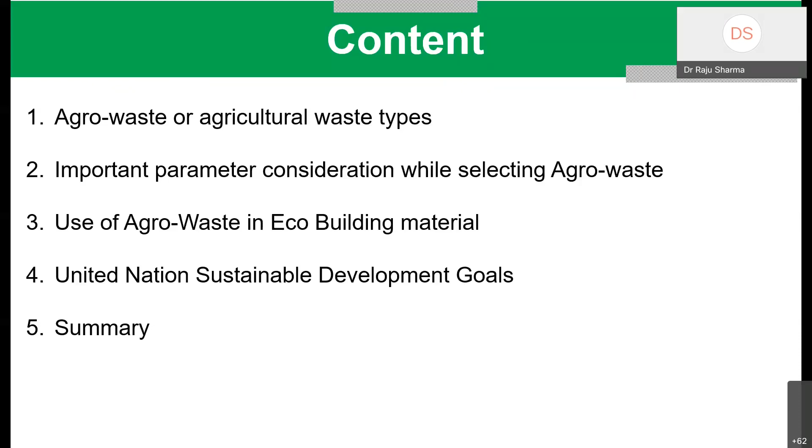So in this presentation, we will see the agro waste or agricultural waste types. Then we will see the important parameters to consider while selecting agro waste, and then use of agro waste in eco building materials, and finally I will give you a glimpse of the UN Sustainable Development Goals, because of these goals only, this sustainability came into existence in the last one or two decades in the field of civil engineering. So it is the right time to make ourselves aware of these SDGs, basically those related to infrastructures. Then we will conclude with a summary.

So if you look at agro waste or agricultural waste, we have various types of waste. We have rice husk, as India and China produce most of the quantity of rice in the world, and that gets exported all over the world. And with that, we have the consequences of producing this waste, and that waste comes in various varieties, and we have to handle those varieties of waste associated with rice husk.

Next is sugarcane bagasse ash. Sugarcane is also produced in very high quantity in India, so the waste associated with that is also a challenging issue to handle. Then there is oil palm shell. It is not something more produced in India; it is basically in Malaysia and nearby regions, where those countries are very much interested in utilizing this particular waste, and they have been successful in using it.

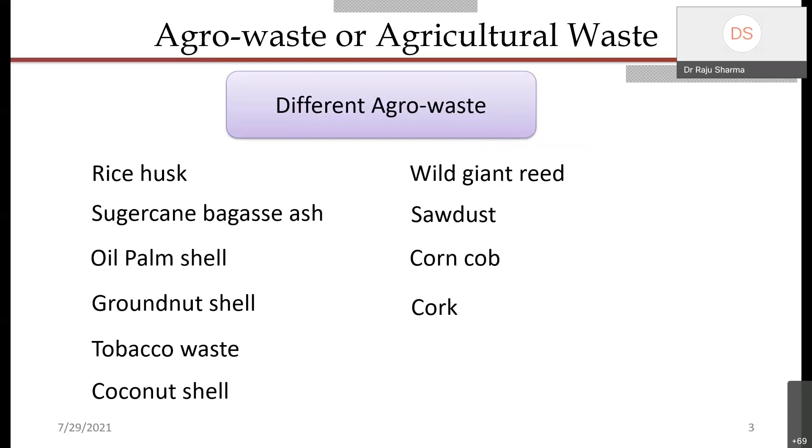Then we have groundnut shell, tobacco waste, coconut shell, wild giant reeds, sawdust, corn cobs, and cork. So we have various varieties of agro waste, and it is not that all the waste have equal proportions of importance or weightage to use in concrete. It is just that various researchers try to utilize this waste based on their own local problems, because some countries have a major problem with rice husk ash, some will have oil palm shell. So based on that, it is a global approach, a global view which I am giving to you, that different types of waste are there.

So if you see this sugarcane bagasse, we never thought that industries would be facing this kind of waste produced from sugarcane bagasse.

As we talked about with the organic state, that will not lead to any success if you use that particular product in a concrete or cementitious material, because that organic material with the period of time degrades with environmental factors, and you're left with voids inside the concrete. So there is no use of using this material in its direct, organic state in concrete.

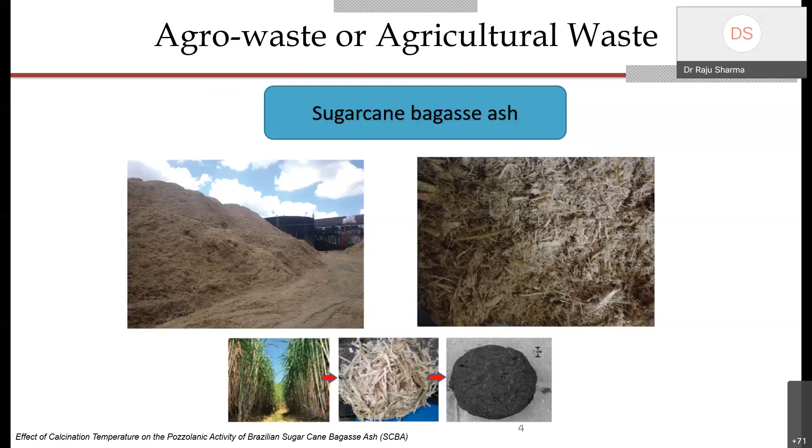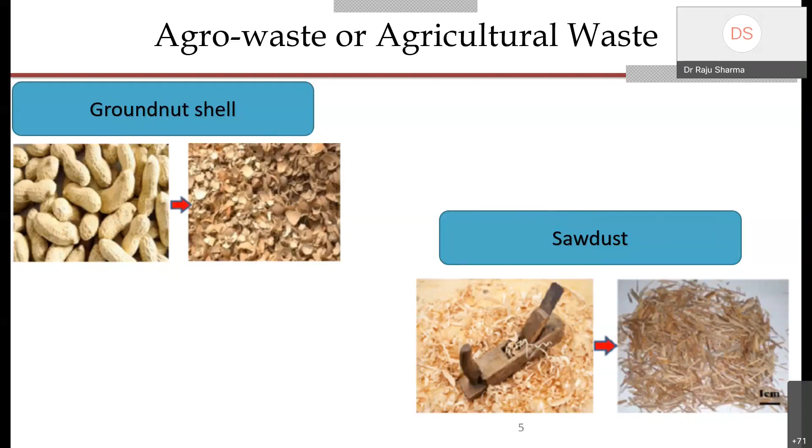I'm showing you images so you'll be more familiar with this. Groundnut shell - some countries face this issue because they produce a lot of groundnut shell. Sawdust is another example, used in concrete. Wild giant reeds are also used as ash in concrete, as is tobacco waste, and rice husk ash - you can see the transformation stages associated with different types of waste.

As I told you, the first waste we produce is the rice husk itself. That husk has no advantage in being used in concrete as a cementing material directly. There's no use in using raw rice husk, because as I mentioned, it will degrade over time in the presence of the aqueous solution in concrete. So you have to convert it into ash, and then use that product in concrete.

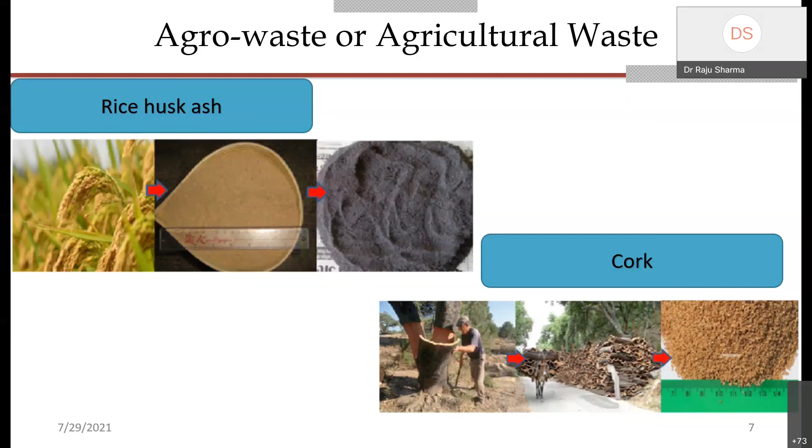Next is cork - some countries have used lots of this product and are trying to utilize it in concrete. Now, next we'll briefly discuss sugarcane bagasse.

The fibrous residue from sugarcane, after the juice is extracted, is about 40 to 45% and is known as bagasse. Bagasse is reused as fuel for heat generation in various industries. Once consumed, it gives ashes with an approximate volume of 8 to 10%, which we call sugarcane bagasse ash.

The production of sugarcane is more than 1,500 million tons in the world, and in India about 10 million tons of sugarcane bagasse ash is treated as waste material. As I told you, if the amount of waste increases, it becomes a problem for any country. If the amount is very small for different countries, they won't focus on using that waste unless it gives very high or good benefits.

So the point is it can be used as a fine aggregate replacement, meaning it acts as a filler in concrete, to mitigate the disposal problem as well as minimize the use of natural aggregates. You can replace it with fine aggregate, or you can replace it with cement. If we replace fine aggregate, we're thinking of it as a filler material, or if the particle size distribution differs from sand, it may improve particle packing in the concrete.

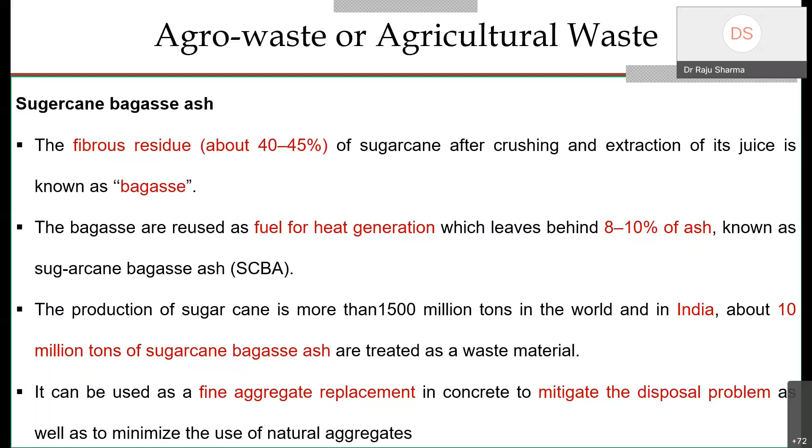But if you think of it as a reactive material, then it will react with the hydration products and may help increase the strength of the material. So it depends on how you're treating this particular waste in your research. If you're replacing cement with this material, you might not achieve a higher percentage replacement - you have to sacrifice performance. But if you replace fine aggregate, you can achieve a higher extent of replacement and still get good results.

Regarding groundnut shell, it can be found in large quantities as agricultural waste in Nigeria, producing up to 2.699, meaning 2.7 million metric tons per year.

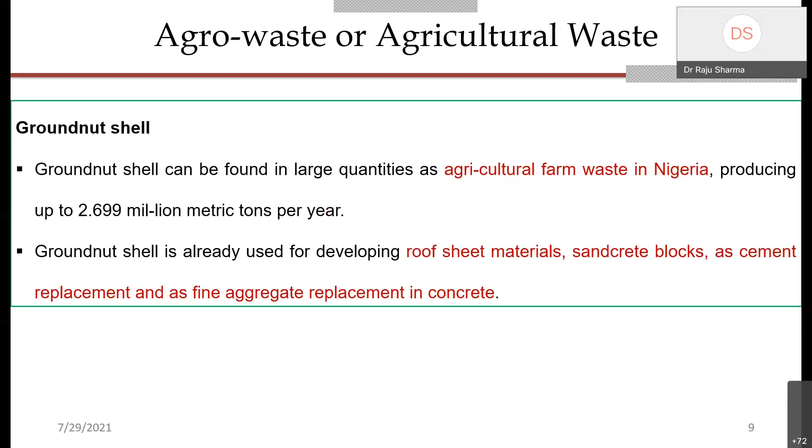Groundnut shell is already used for developing roof sheet materials, sandcrete blocks as cement replacement, and as a fine aggregate replacement in concrete. Now next is sawdust.

We saw that as a waste, sawdust is the main component of particle board. It has a variety of other uses, including serving as mulch, an alternative to clay cat litter, or as a fuel. The use of sawdust for making lightweight concrete has received some attention over the past years. Mageswari and Vidivelli reported that as a substitution material for natural sand, sawdust might be the right choice as fine aggregate in concrete.

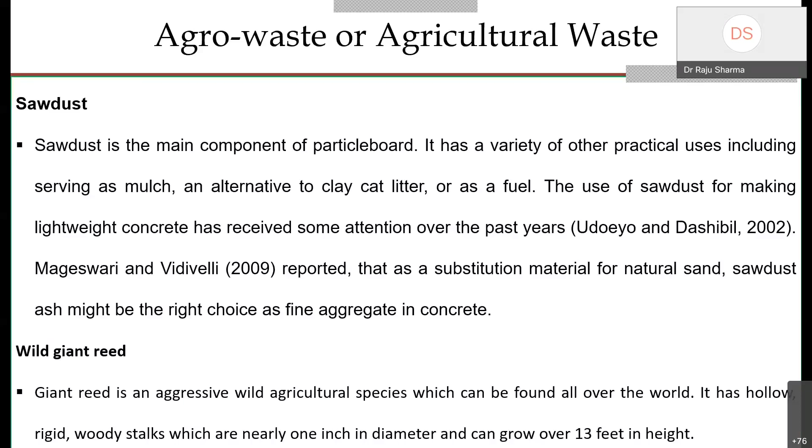Wild giant reed is an aggressive wild agricultural species which can be found all over the world. It has hollow, rigid, woody stalks which are nearly 1 inch in diameter and can grow over 13 feet in height. So some people are using that particular waste also in concrete.

Rice husk is one of the fundamental agrarian wastes, obtained from the external covering of rice. When you uncover and remove the cover from the rice grain, you get this particular rice husk. Not exactly rice husk, but you can use rice husk ash with concrete up to 10% replacement.

But the point is the physical and chemical properties of rice husk matter a lot. So in my presentation I will emphasize how the physical and chemical properties affect the properties of the final product, and what different parameters you have to look into while considering these types of waste for producing concrete.

Next is cork. Cork is a renewable resource, a natural lightweight cellular material separated from the bark of cork oak trees. A variety of studies have analyzed utilizing cork as part of the construction industry, mainly in cement mortar, because of its unique composition and cell structure, which gives low density, low thermal conductivity, good sound absorption, and water resistance.

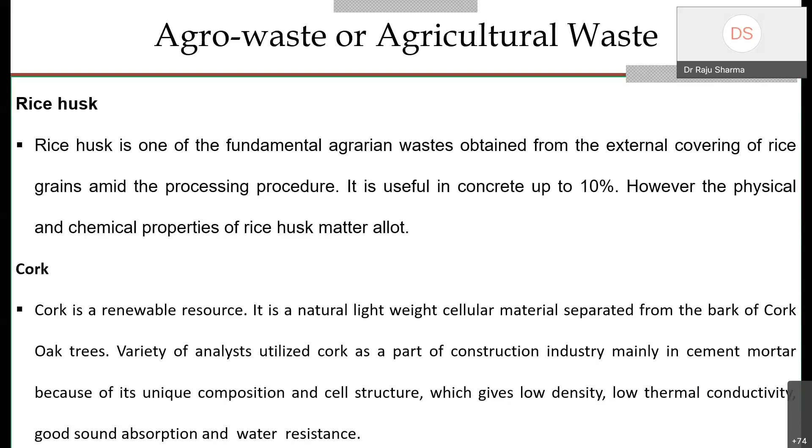Now, next is tobacco waste. Tobacco may not be of much concentration for some countries, but in some countries where it is highly used, they are looking for a solution for that. So when you go for tobacco waste, that can be used for lightweight concrete rather than normal concrete.

So to produce lightweight concrete, tobacco waste can be considered a good ingredient. But if you want to produce normal weight concrete with it, you cannot, because the specific gravity is low and you cannot produce the same amount of weight using that particular tobacco waste.

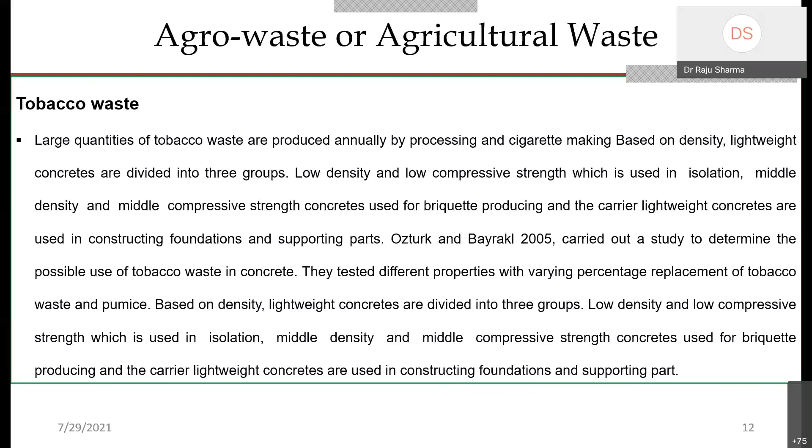So you get low density and low compressive strength concrete from tobacco waste, which is used in isolation. Middle density and middle compressive strength concrete is used for producing briquettes, and the lightweight concrete is used in construction foundation and supporting parts, right?

Then next is corn cob. Corn cob has silica oxide of more than 65% and a combination of alumina and silica of more than 70%. This means corn cob ash can be used as a cementitious material in blended cement concrete. Although the use of the ash of this waste in concrete technology started more than a decade ago, the use of corn cob grains as aggregate is only recently developing.

So let me brief this discussion to conclude these 5-6 slides. You have seen that various types of waste are available with us, in different forms. It may be a kind of direct waste after using the product, which we then use again for fuel, and the waste produced from that decreases in amount and we use that waste again. So you can see it approaches the problem in different ways. It is a kind of engineered problem where you get the material and make it suitable for different applications.

If you want to produce lightweight concrete, it's okay to use tobacco waste. If you want to get high strength concrete, you cannot produce that with tobacco waste. So what is the best solution to get high strength concrete? You have to go with rice husk ash. People are using that particular waste in ultra high performance concrete development, so you can produce that with it. So it's a kind of material where nothing is unusable as an ingredient in concrete.

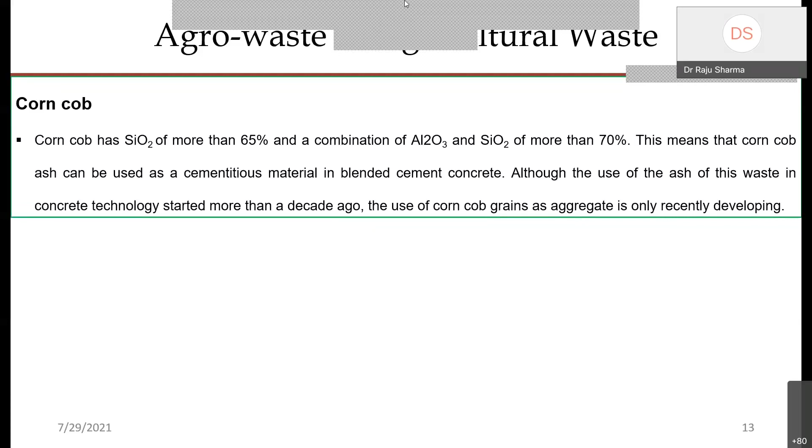Everything can be used, but you have to look at the application of that particular product, what you want from that particular thing. If you want lightweight, you have to use that particular kind of waste material. If you want ultra high strength concrete, you have to see the waste in a different way, from some in-depth technical parameters.

So what are those parameters? I'm making this presentation in different segments to connect the previous general discussion to the technical aspects of this particular waste. So we will move towards the important parameters associated with the use of agricultural waste or agro waste in concrete.

Now, if you see here, there is a comparison of sand, crushed granite, sugarcane bagasse ash, groundnut shell, oyster shell (OS), and sawdust. We have rice husk ash, wild giant reeds, and we have cork also.

If you see the mechanical, physical properties of these particular materials, the specific gravity is 2.38 to 2.64, and crushed granite is also having the same, but a bit higher than that because it has a dense microstructure than the sand. And then you have SCBA, sugarcane bagasse.

You can see the variety, the range, of this specific gravity. That is the point where researchers feel difficulty to standardize their results, because some parts of the world have lower specific gravity, and some parts have a bit middle range, and some have high specific gravity.

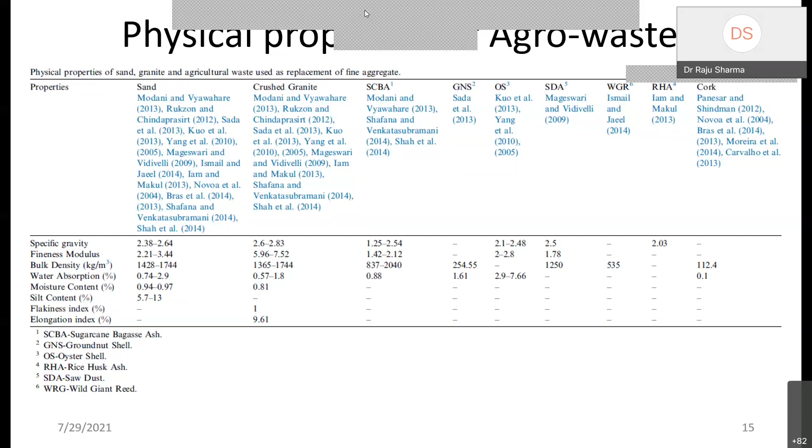You can see the oyster shell is also having 2.1 to 2.48, so it is a good kind of replacement as a filler with the sand. You can see the specific gravity here, so it can be used, but it cannot be used solely for producing lightweight aggregate unless you are choosing lightweight coarse aggregates. By only replacing sand with OS, you cannot produce lightweight concrete, but maybe only by replacing sand with SCBA, you can produce lightweight concrete. RHA is having 2.03.

Cork is... then you can say fineness modulus. So another physical property which is most important in changing the microstructure of concrete is the fineness modulus. It can change the packing behavior, it can alter the need of binder in a particular volume. This is very important, because fineness is very much related with the surface area of the product.

The surface area matters because nucleation always starts from the surface when it comes in contact with the aqueous solution, and that surface creates the hydration product. As much as you have higher surface fineness, you can create high strength, but it is not a straight line - it is related with the amount of binder as well. You have to change the binder up to a certain percentage; after that fixed percentage, your results may decrease. So this is not a straight statement.

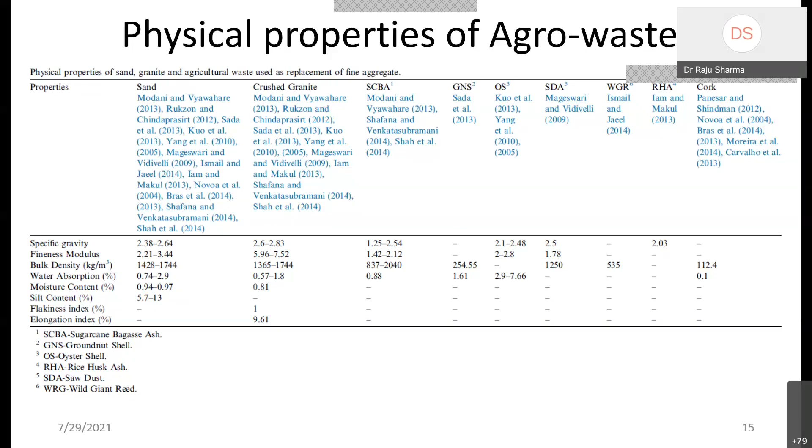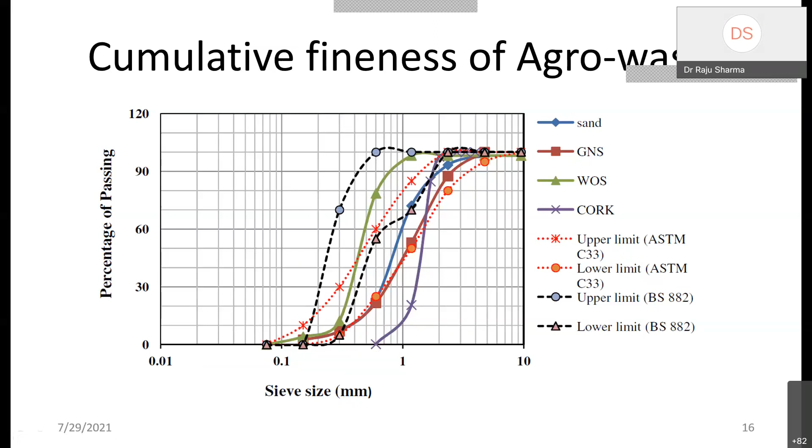So they use it accordingly. Let me show you the fineness of different agro waste. Here I am showing the sugarcane bagasse ash, which is calcined at 500, 600, and 700 degrees Celsius. They prepared the fineness modulus, the cumulative percentage fineness, and found that the product is basically very fine as compared to the cement.

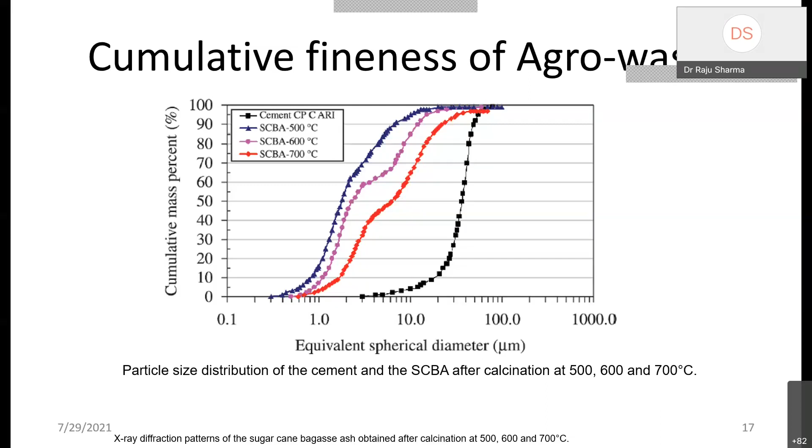So one thing is very clear from that: it will give you the packing, it will improve the packing behavior of the concrete. It is very much clear from here. The packing behavior of the concrete definitely changes when you use it as a percentage replacement in concrete. But I'm not talking about how it behaves chemically, because I do not know the chemical composition of this particular sugarcane bagasse ash, so I cannot comment at this slide how chemically it will affect. But how it will affect physically, you can see from here. If you replace with the cement, more finer particles you are putting into the system, and you will get a denser structure.

Now, I'm just connecting these things with some already established statements about supplementary cementitious material, so that you can use this kind of logical reasoning in your research as well. If you see, silica fume is an extremely fine particle. It is spherical, glassy, with an average diameter of 0.1 to 0.2 micrometer. The specific surface area is in the range of 15,000 to 25,000 meters square per kg, compared with the value of 300 to 600 meters square per kg for other cementing materials. So these are the physical properties of silica fume.

Now, how can you use this information to make the reasoning in your research? If you have some results, how can you explain them? The presence of silica fume in fresh concrete generally results in reduced bleeding and greater cohesiveness. This higher fineness of the silica fume, leading to higher surface area, results in higher reactivity. Consequently, superior strength and durability is obtained.

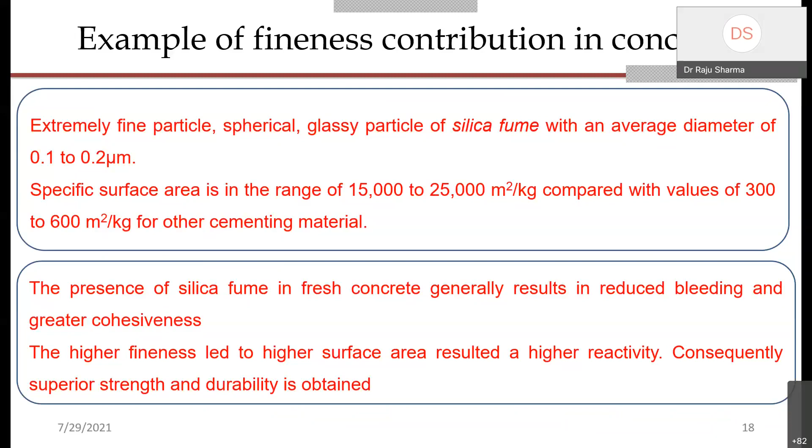This higher reactivity, still, being a researcher, you cannot conclude without looking into the chemical composition of this particular product. So if you say higher surface area increases the strength, yes, this can be a good inference after looking at the cumulative distribution fineness of the product. But without chemical composition, you cannot say it has high reactivity, although it's already a firm statement in research. So I'm using that word here without showing you the chemical composition, but just to show you how you can use this particular reasoning.

This calcium content is very high because if the calcium is 1%, the results will be different than calcium which is 10 or 11%. So therefore, some researchers are getting different results than others because of this kind of difference in chemical composition. Now, if you look into the oyster shell, you can see that.

You can see there is a higher amount of calcium. So if there is a higher amount of calcium, that can be representative of a reactive kind of filler or reactive supplementary cementitious material. So the behavior of this particular product is more dominant towards the hydration product formed by calcium rather than silica.

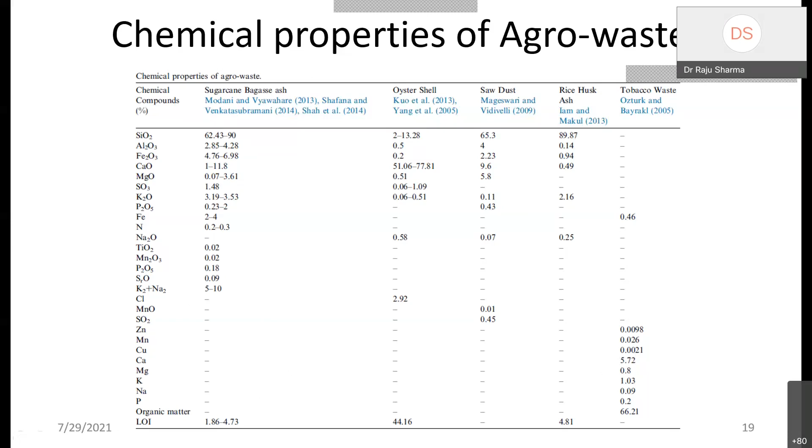Then we have tobacco waste. You can see this tobacco waste does not have the kind of elements which we want for producing good quality concrete. By this statement, you can say here calcium is more, so it may react with that a little bit but not much. It will act as a filler kind of product.

Now if you look into oil palm shell waste and coconut shell and compare these properties among them, you will find that the specific gravity of oil palm shell and coconut shell is lower than crushed granite. So it means there is use in replacing crushed granite with oil palm shell and coconut shell - if you replace that, you are taking the heavier material out of the system and putting lightweight material into the system. So by seeing this, you can say the final product will be a lightweight material, having a lighter density than normal concrete.

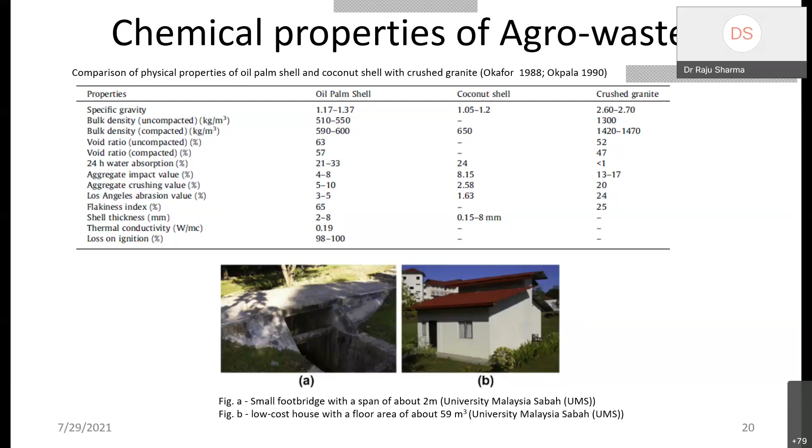So there are other combinations as well. Next is an example of a small footbridge or low cost house with a floor area of about 59-60 meter cube, produced at University Malaysia Sabah. This is the final product of cumulative research from different countries, we can say.

Now in more depth, if you go into the chemical properties of agro waste - here's an example of bagasse, where you can see XRD of the same product but at different temperatures. This means calcination of this particular product has been done at different temperatures to find out the effect of calcination on the final product.

So if you see here, around 27 two-theta degrees, you can see a peak with a plus sign which shows SiO2. So here you can see amorphous SiO2 is increased as the temperature is increased. And you can also see at 500 degrees Celsius there is almost no amount of CaSiO3, but as you increase the temperature, you get peaks of CaSiO3. So by this way, you can analyze how calcination, how your treatment of the waste, improves the final property of the concrete.

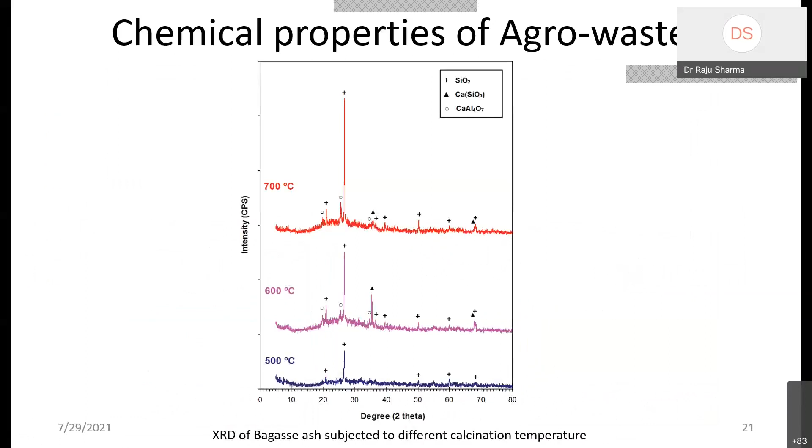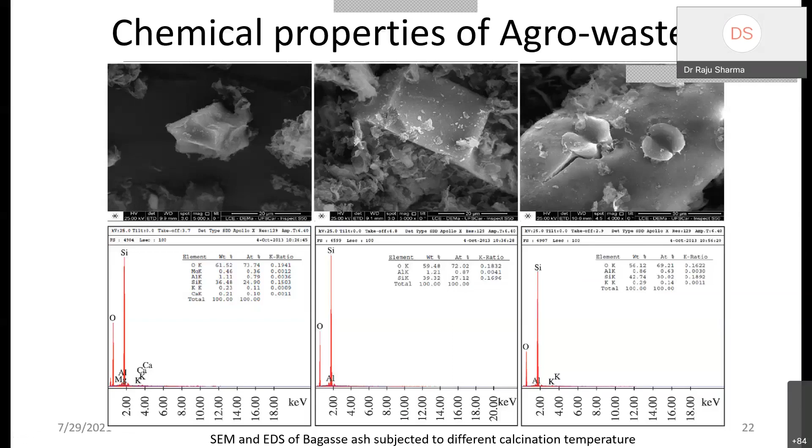When you move to the next temperature, 600 degrees, you can see in the central bottom EDS image that SiK weight percentage is 39 and atomic weight percentage is 27. Compared to the previous one, the silica is getting higher. At the higher temperature, silica is 42% and atomic weight is 30%. So it's increasing the amount of silica in the paste, not as an individual material, but increasing the chemical composition, which may give an advantage when using it in concrete.

It is advantageous when they replace this sugarcane bagasse ash with a fixed 10 weight percent replacement of cement. So SCBA is replaced with cement at 10%, with the variable being the different calcination temperature of the final product.

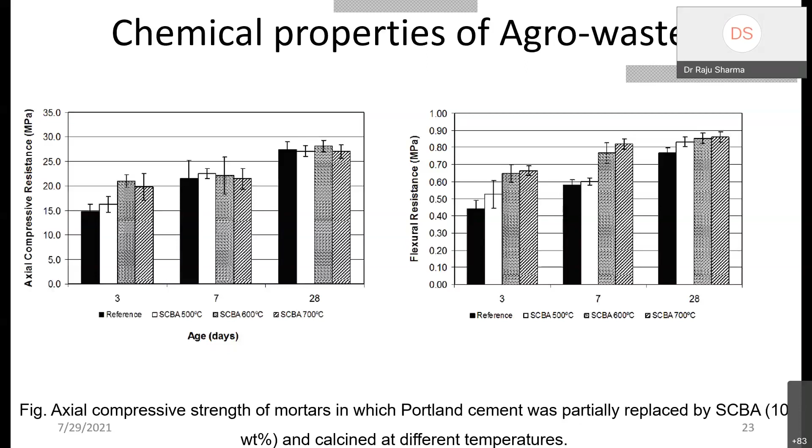Now, to justify the chemical composition contribution in concrete from different materials, take the example of class F fly ash, especially low calcium fly ash with high carbon content or LOI, which increases the setting time. This is because the unburned carbon, considered as LOI, is not reactive at all; it's just carbon content acting as a filler.

It's like making a box denser and denser, but those particles are not able to create a chemical attachment with each other. This is the scenario when you use high content of LOI in any waste product. If your LOI is high, it gives a filler effect, but it cannot give good retention—it means the composite suddenly breaks.

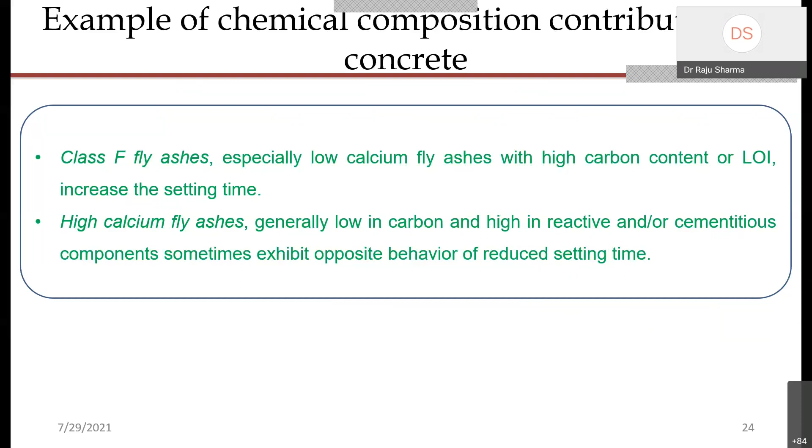High calcium fly ash is generally low in carbon and high in reactive, cementitious components, and sometimes exhibits the opposite behavior of reduced setting time. This is the difference. Fly ash particles consist of clear glassy spheres and spongy aggregates. The particle shape and surface characteristics of various waste materials and bioproducts can be found using morphological tests such as scanning electron microscopy.

So by doing so, you can find out the morphological characteristics. What morphological characteristics help you? Like if you know that is a glassy sphere, it has a glassy surface, right? So the glassy surface helps to accelerate the slippage when it is wet. So when the material having fly ash is going to flow under gravity, it flows more than the concrete which is not having fly ash, because the surface is glassy. It has more slippage behavior, so it gives you a higher workability kind of thing, I can say. A more filling effect it can give you.

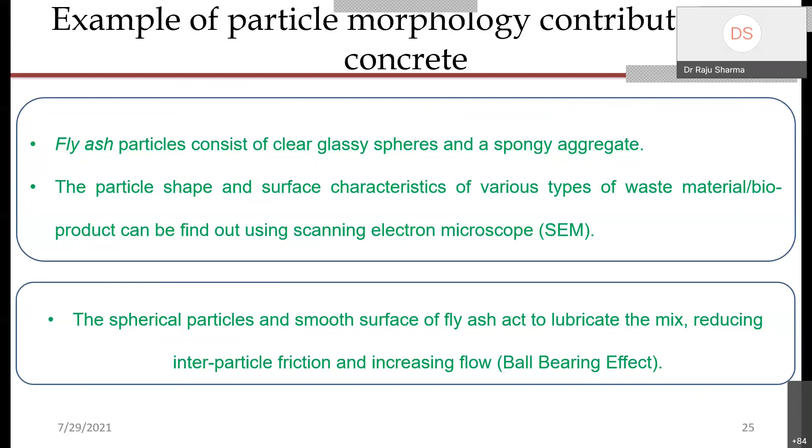Now, it depends upon calcium content, particle size distribution, loss on ignition, and specific surface area, right? If you say the rice husk ash contains a high amount of SiO2, so well burnt and well ground rice husk ash is very active and considerably improves the strength and durability of cement and concrete. Here the point is well burnt and well ground rice husk ash.

This is the game where the product changes its behavior globally, right? So well burnt and well ground rice husk ash - we will see in the next slides how this particular product, I mean these two factors, affect the performance of the final product. So it is very active and improves the strength significantly. Therefore, this improvement in well burnt and well ground rice husk can give you a product like ultra high performance concrete also.

So many publications in the field of ultra high performance concrete are developed with rice husk ash. So inclusion of RHA in concrete reduces porosity and decreases the amount of calcium hydroxide in the interfacial zone, and the width of the interfacial zone between aggregate and cement base. So ITZ is a very important part because it's weak.

And if some of you may be working in the field of ultra high performance concrete or high performance concrete, then you have seen the statement that you have to avoid the use of coarse aggregate to produce ultra high performance concrete. It is a kind of mortar. When you avoid the use of coarse aggregate, it means you are avoiding the existence of ITZ, right?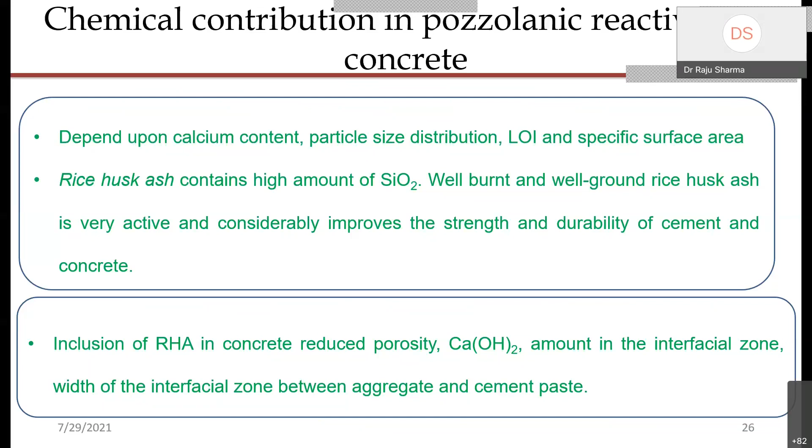When your ITZ is not there, it means the weak phase is not there. When the weak phase is not there, early crack formation under loading will not occur. And if it will not occur, the composite can retain higher strength, can retain higher load, right, and produce more hydration product. So this is all the philosophy difference between ultra high strength and normal strength concrete.

Now, if you go with the replacement proportions, many people did it with different codes. You have Indian Standard 10262. Now the new code has also arrived in this design mix, and there is an American code also, a Korean code also, a Canadian code also, right? So people developed this particular thing with different design strengths, M20 up to 51.6 MPa, and different strengths you can achieve through this particular replacement level and type of cement used.

There are different types of cement people used and different types of agro waste they have used, with different replacement levels. So you can see that some of the replacement goes up to 75% as well, with groundnut shell. But I haven't seen the result of that in terms of performance, so we cannot comment. But yes, people tried to replace cement with agro waste as much as they can, right? But feasibility is also one of the points here, which gives you the limitation.

Now, one coconut shell lightweight concrete composition is given below on the screen, where cement is 510, water to cement ratio is 0.42, coconut shell is 330, fine aggregate 750, slump is 5, and 28 days cube strength is 27, which is good strength, and density is the criteria to get the lightweight, so it is 1970, right?

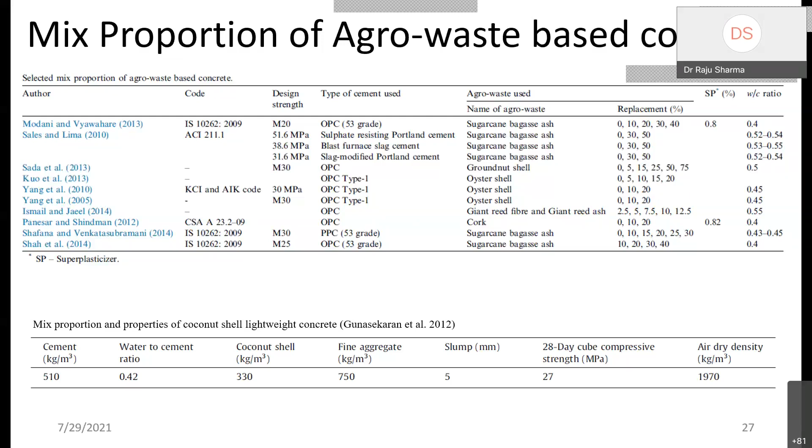So by this way people are producing different kinds of concrete, because now we call it not a controlled concrete, we can say it's a tailored concrete, we can say it's an engineered concrete rather than saying a simple concrete, right? Now, based on this discussion, what we can conclude is yes, waste can improve the performance of concrete, but the extent, the magnitude may differ, depending on how you treated your waste, with different processes, right?

So these four things affect the performance: chemical composition, particle morphology, pozzolanic reactivity, and fineness. So these are the four aspects where you have to learn the fundamentals of the waste to give the reasoning of your research for publishing, right?

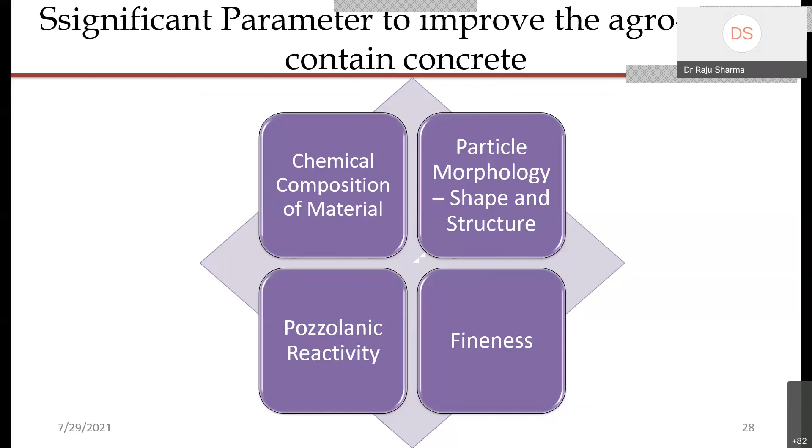So I will take rice husk ash (RHA) as an example, because it is the most popular agro waste material used nowadays. It has been used in new types of concrete such as self-compacted concrete, high performance concrete, ultra high performance concrete, ultra high performance fiber reinforced concrete, and geopolymer concrete as well.

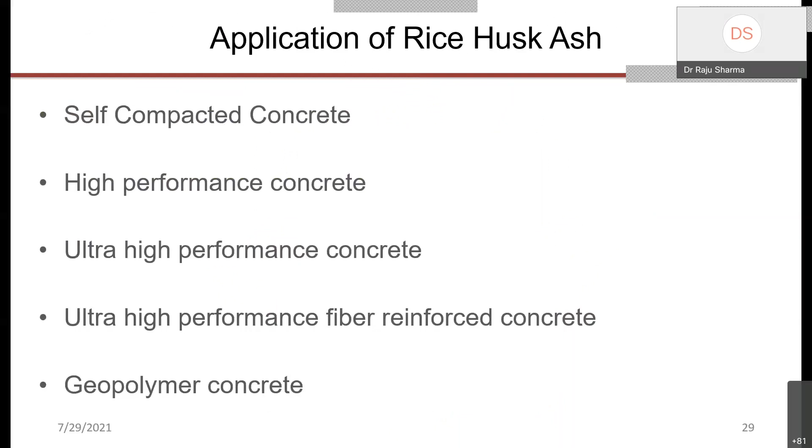So different types of concrete, all new, where rice husk ash is successfully used. We have seen that the chemical composition of RHA varies depending on the combustion condition. We haven't seen this particular thing yet, we will see it in the coming slides. I'm focusing on how combustion affects it. We saw the phases in the form of XRD.

So when it is burned at high temperature, above 700 degrees Celsius, only crystalline silica remains. Therefore you have seen the peaks at 700 degrees in the XRD of the bagasse also - more crystalline phases are there. Just a supporting line: only crystalline silica remains, which can be used in the ceramic and steel industry.

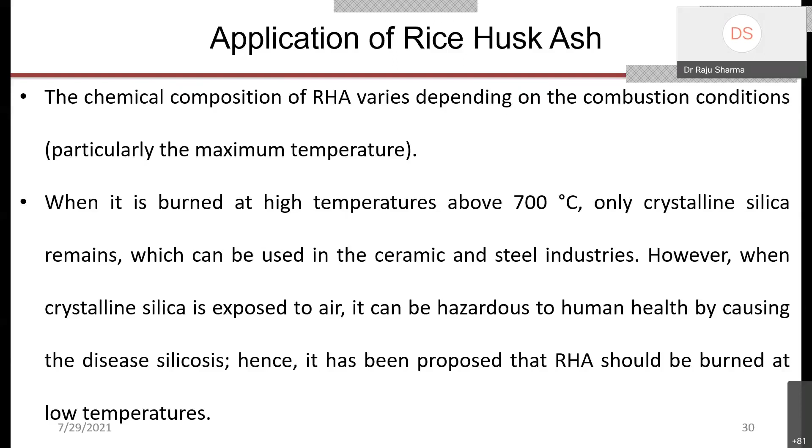However, when crystalline silica is exposed to air, it can be hazardous to human health, causing the disease silicosis. Hence it has been proposed that RHA should be burned at low temperature. So this is the philosophy of using this RHA.

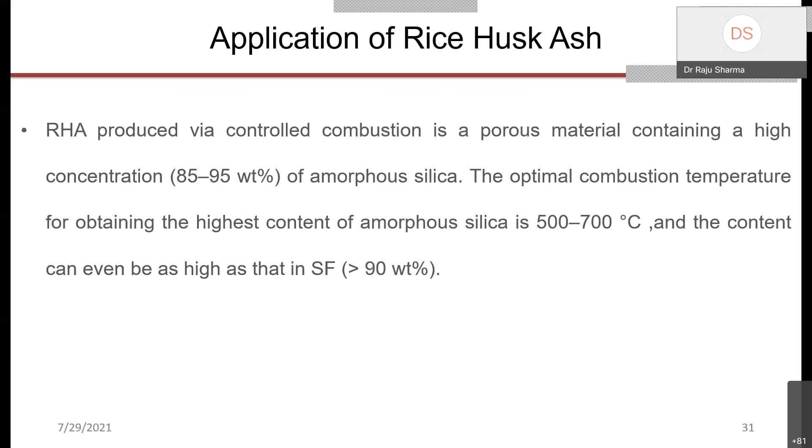RHA produced by controlled combustion is a porous material containing a high concentration, more than 90%, of silica content. The optimal combustion temperature for obtaining the highest amount of silica content is in the range of 500 to 700 degrees Celsius. I told you this is a range - you cannot get a good single temperature. So 500 to 700 degrees Celsius is the range, and the content can be as high as more than 90%.

Now there is one example of how this rice husk ash property changes with different processes. First you can see on the top left image, this is the temperature flow - it increases at 2 degrees Celsius per minute, and at approximately 5 hours it reaches the maximum temperature of 600 degrees Celsius. Then at 2 hours it is burned at 600 degrees Celsius, and then it cools at 2 degrees Celsius per minute. It takes a total 13-hour journey for rice husk ash to get the material.

So if you see image B, you can see rice husk before heating, and then when you burn it under uncontrolled combustion at 400 degrees Celsius - as you can get from any industry with unburned, uncontrolled combustion - you get a black RHA. It means there is a lot of unburned carbon present. When you process it and get it out at 7 hours without cooling, you get a gray kind of RHA. When you allow it to cool, you get a white kind of RHA. So these are the different forms you can get.

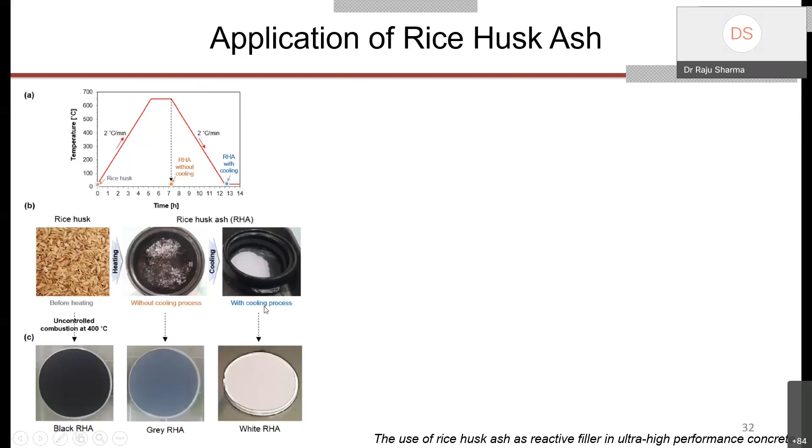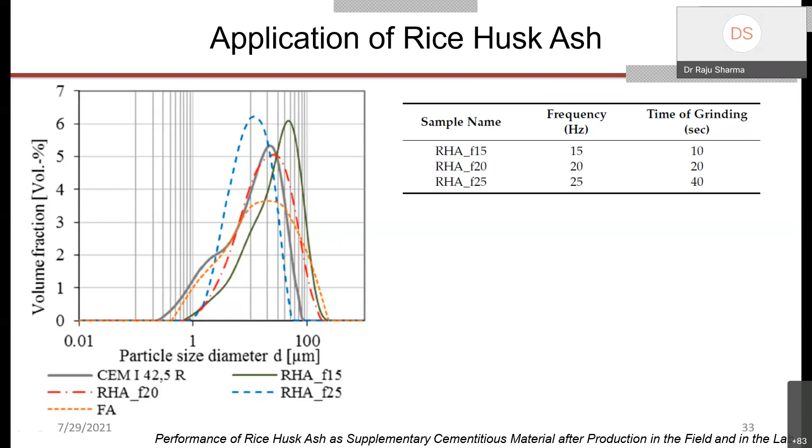Now if you see the fineness in terms of surface area, when you increase the grinding time, your average particle size decreases, and your specific surface area increases. If your particle size decreases, your surface area increases, and by that way you can justify your workability results. Workability may decrease if you fix the liquid content, because the finer area increases and needs more water. So accordingly, you have to change the water content.

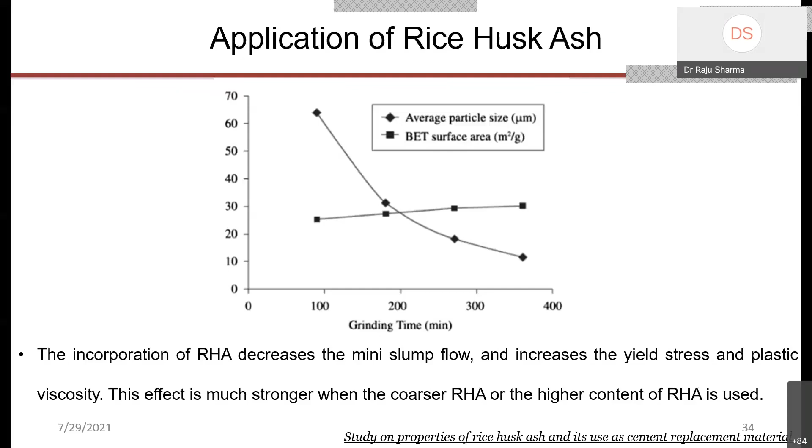Okay, so these are the results of the technical properties, which is very important here. Next is fresh and mechanical properties of RHA. As I discussed, it may change with a 10 to 15% replacement level, and you can increase the strength of the particular product.

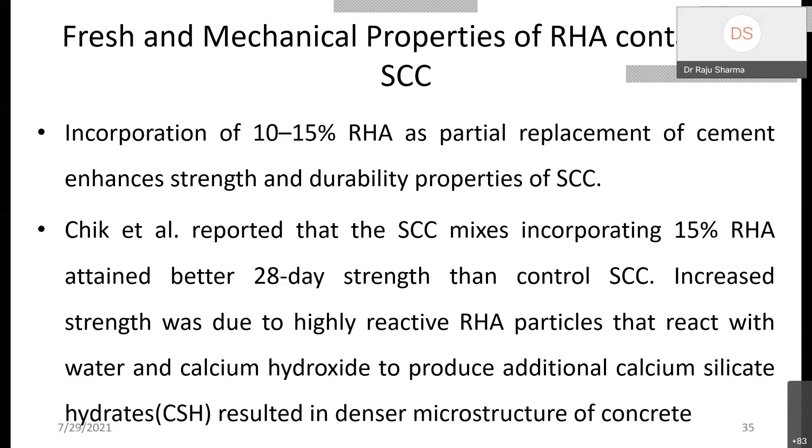Now next is eco building material, because agro waste is not only available for concrete products. As a building infrastructure, concrete alone doesn't cover everything. You have to work with other building products also. So this is another recent area of research: the binderless fiberboard, where they are not using a binder. I'll give you an overview of this and how it's important as a building infrastructure product.

So here, with binderless boards - when you produce fiberboard with a binder, it's having epoxy, and that kind of epoxy may, in the external environment, affect human health. The cost of the product also increases when using epoxy, and the processing time increases to make the fiberboards.

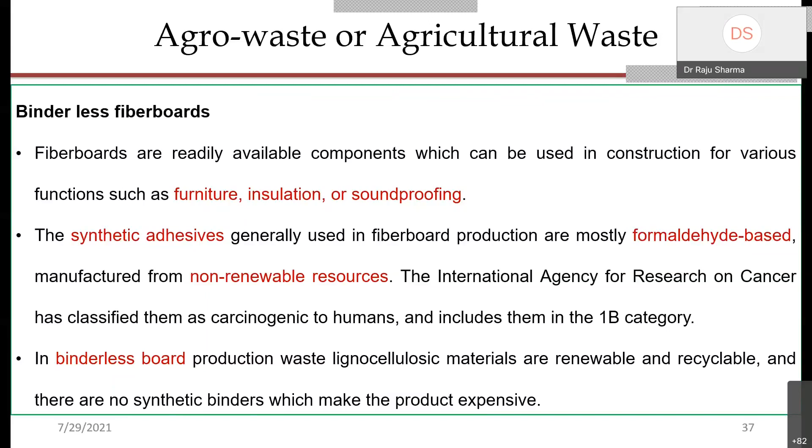But once you produce the fiberboard without binder, it's an economic solution to produce an effective product for building. So many fiber-based industries have increased their interest in replacing wood fiber due to the low cost of agricultural by-products available worldwide.

All the total costs depend on location, quality, and harvesting costs such as chopping, baling, or on-farm hauling of crops, among which baling is the most expensive, because there's a game of making the fineness. Making the fineness is the game, and the baling effect may increase the cost of the product, so you have to find an optimum size to reduce that particular product size.

Therefore, using residual material to produce fiberboard is a cost-effective and environmentally friendly choice, which also considers the waste management hierarchy. The waste framework sets prevention as the foremost priority, followed by reuse and material recycling. So they are therefore using agro waste in making fiberboard.

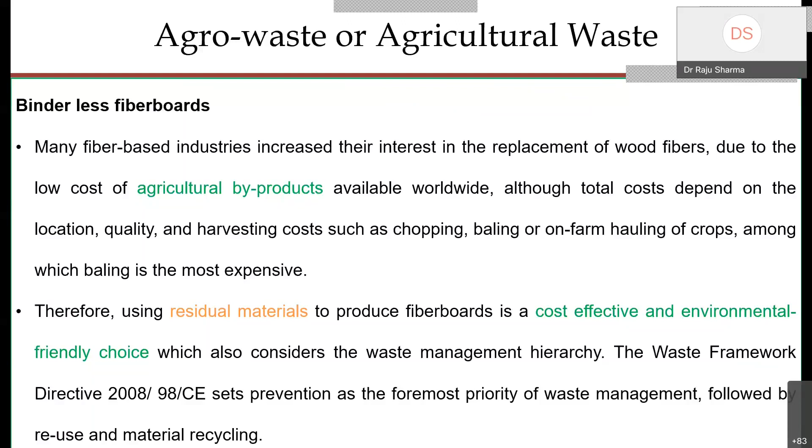Smaller amounts of hemicellulose lead to better resistance to water, as hemicellulose is hydrophilic and has a high absorption rate. That means agricultural waste in the organic state, without burning, has different components - hemicellulose, low hemicellulose, extractives. These are the different components based on which the product's actual behavior depends.

So hemicellulose gives better resistance to water - if you have agricultural waste with a low amount of hemicellulose, that can give better water resistance. Low hemicellulose content may lead to weak bonding strength, so fibers with low hemicellulose will have limited durability of the product.

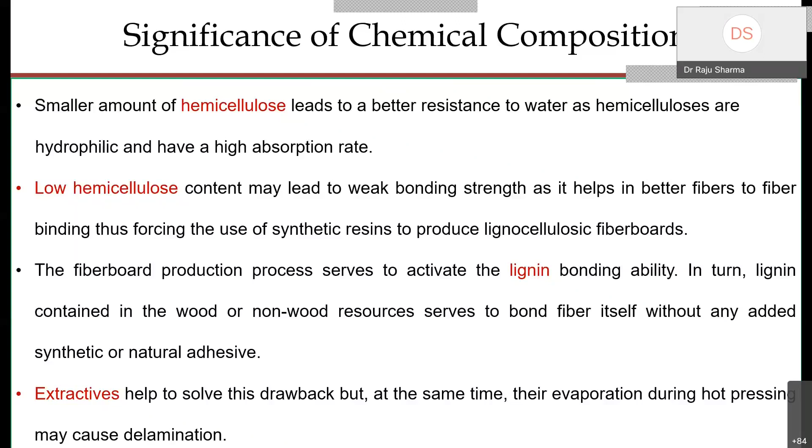The fiberboard production process serves to activate the lignin bonding ability. In turn, lignin contained in wood or non-wood resources serves to bond the fiber itself without any added synthetic or natural adhesive. Extractives help solve this drawback, but at the same time their evaporation during hot pressing may cause delamination, so there are limitations with this too.

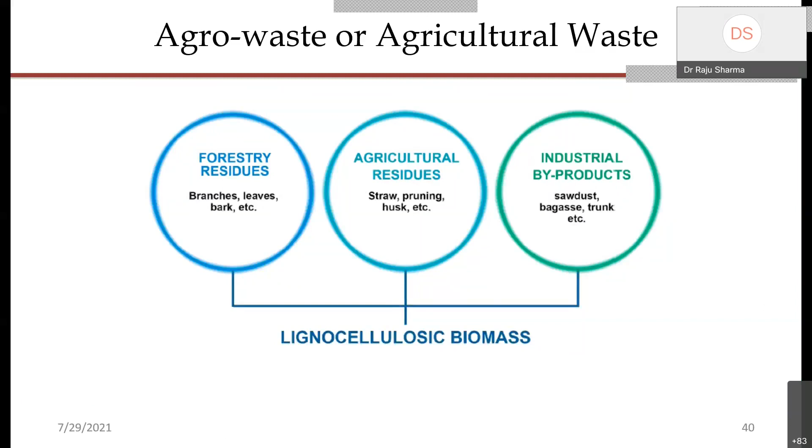To produce these things, we have forestry residue, agricultural residue, and industrial by-products also. But forestry residue is nowadays not a good source, because we need to preserve the forest land. So we are not looking into this solution to use forestry residue. Industrial byproduct is there, and next is agricultural residue, which people are using nowadays.

Wheat residue is considered good agricultural waste for manufacturing fiberboard. This residue can also be used. Rice straw is also used to produce fiberboard. So Vitis vinifera pruning has also been used for fiberboard manufacture.

Kenaf has attracted special interest in fiberboard production too, especially for its rapid growth - it can reach a height of 3.6 to 4.2 meters during the growing season. So people are using kenaf because it is available in higher quantity, and can use it to produce fiberboard.

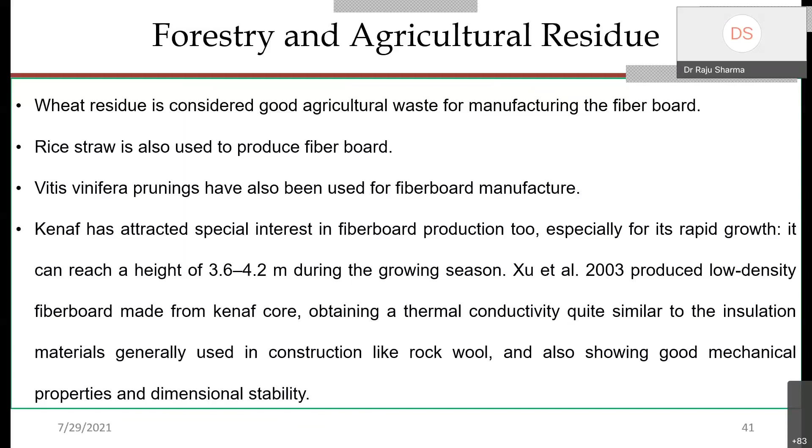If you say it is not about the latent heat, it is about the sensible heat storage.

Industrial byproduct bagasse is probably one of the oldest non-wood resources used for fiberboard production. It is a byproduct of sugarcane. We have studied this earlier, but it's considered here just for making fiberboard.

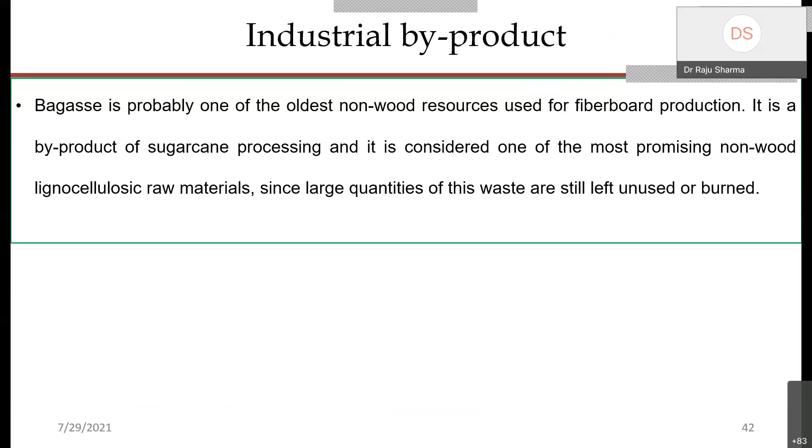Now, in fiberboard application, the construction industry makes extensive use of wood-based panels, which cause environmental problems both in terms of the high demand for wood and emissions from the use of synthetic adhesives. Binderless fiberboards represent a possible solution for both problems.

On one hand, the use of alternative fiber supports the concept of forest protection, as I told you, by saving the forest through the use of agricultural waste.

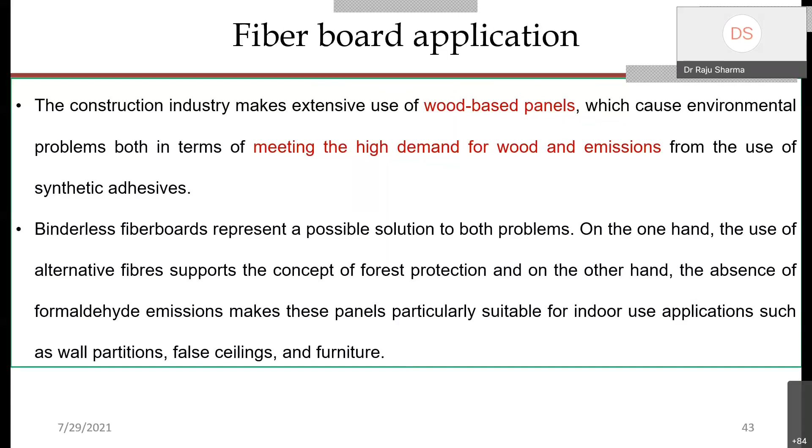The absence of formaldehyde emission makes these panels particularly suitable for indoor applications, such as wall partitions, false ceilings, and furniture, because the presence of epoxy may affect the internal environment through chemical reactions and may affect human health.

So these are different images of fiberboard, and you can see the difference in appearance due to their fineness, due to chopping. Increasing the chopping may increase the cost of the product and may also increase the quality. Decreasing the chopping may change the appearance and performance. So somewhere in between, you have to optimize and engineer the requirement accordingly.

Whatever the requirement from the final product, you have an option accordingly. If you need a fine surface, you have to do more chopping. If you need a coarser kind of surface where it's not so important, you can do lower chopping, and the cost will decrease accordingly. So this is all the aspect of using that.

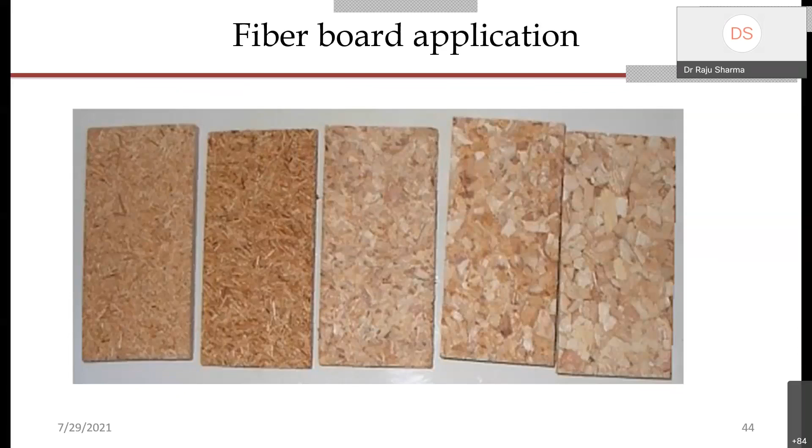Now, if you see the application of agro waste in the construction sector, agro waste as a whole is applied in cement, concrete, mortar. These are different types of concrete on the left side: engineered cementitious composite (ECC), self-compacting concrete, high performance concrete, ultra high performance concrete, geopolymer concrete, and other types as well. These are the major areas where agro waste is being used.

Next is brick, on the right side option. Bricks are also made using agro waste. You can produce fired and unfired bricks. Nowadays, unfired bricks are more acceptable because they avoid CO2 emission during firing in the kiln to harden them. So unfired bricks are better for making them thermally insulated and lightweight.

Also agro waste is used here. As you've seen, if bagasse is replacing material, the specific gravity is less, so you get a good lightweight product. Then you've seen fiberboard also provides acoustic and thermal insulation. To get those kinds of benefits, people are using fiberboard.

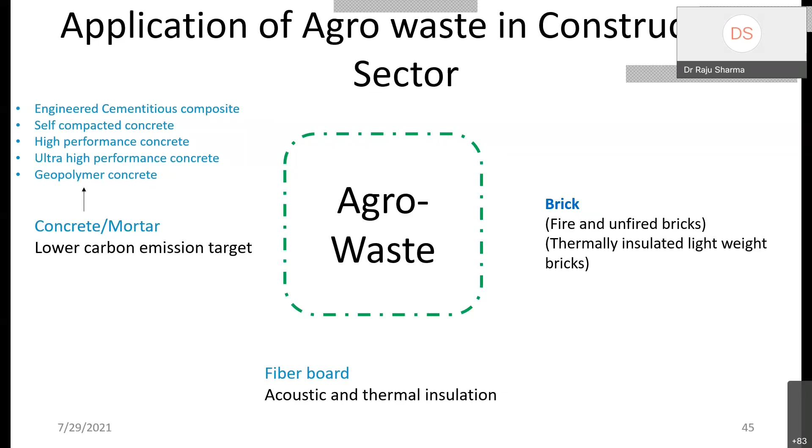So it's not like you can use agro waste only on concrete. You can use it in different building materials rather than concrete only.

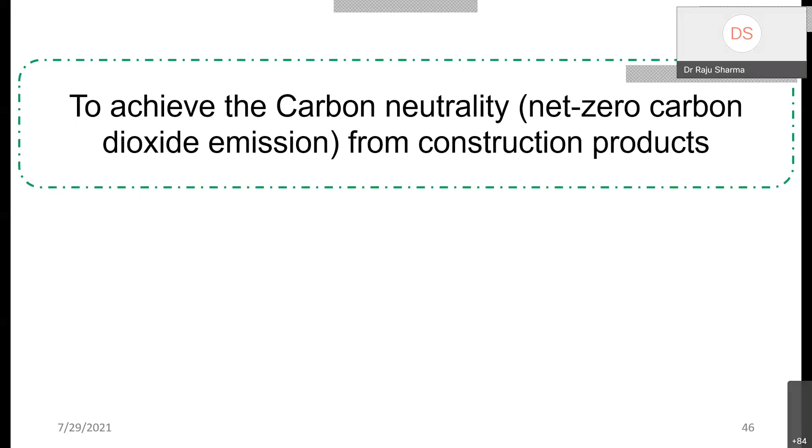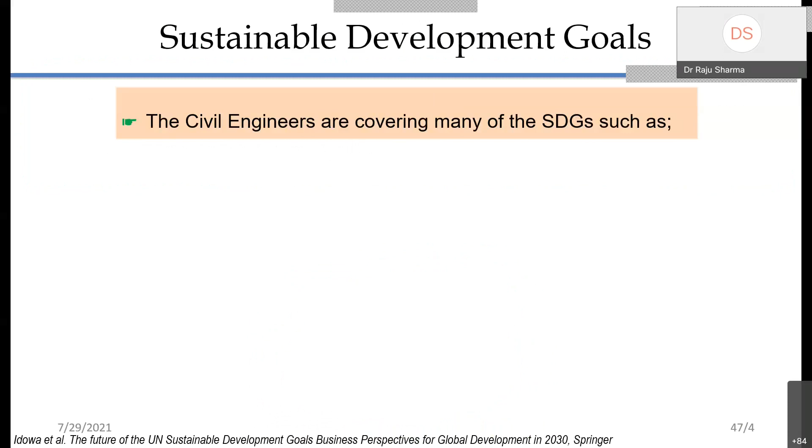Now, to achieve carbon neutrality, zero carbon dioxide emission from construction products, that's what we are doing. So why is carbon neutrality so important? I'll give you a brief background: in 2015, at a UN meeting, they developed the Sustainable Development Goals, SDGs.

We have a total of 17 Sustainable Development Goals. Civil engineers can contribute directly or indirectly to these SDGs. Therefore, you've seen that in the last two decades, research in sustainability terms is more appealing and more prominent in research.

Most journals are now framing their scope of publishing around sustainability, this particular word, whether it's about a building, a bridge, a material, or a hybrid field, they are using this sustainability term so that they can contribute towards these particular sustainable goals.

Nowadays you can see that on SCI, Elsevier websites, and many journals, on the left side they write that they support SDGs. You can see they state they support SDGs, and they show small icons on their image or screen. So this is the change happening right now because of these SDGs.

As civil engineers, we are more attached with affordable and clean energy, with decent work and economic growth, with industry innovation and infrastructure, with the 11th goal on sustainable cities and communities, and then responsible consumption and production. The 12th is basically related to recycling products, waste products, a genuine use of the product.

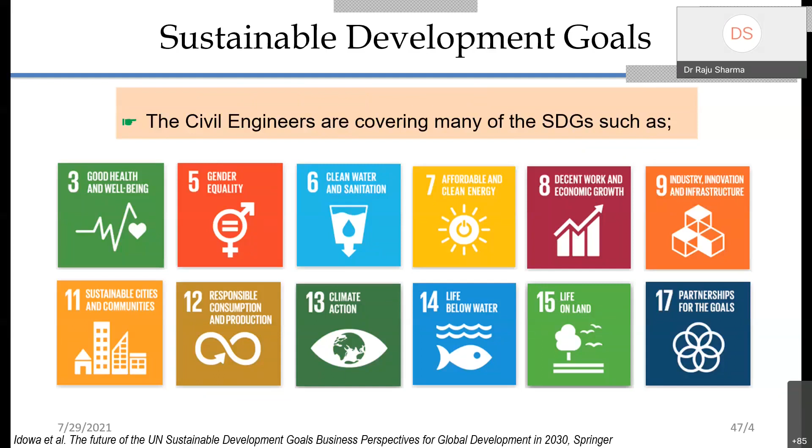So we are somehow, from the research, supporting these SDGs. And in India, there are various schemes in which Satat Bharat, Sanatan Bharat, Sustainable India is one of the schemes that support the infrastructure related SDGs. So if we correlate this, how we are contributing this particular thing with the SDGs, you can see here.

So by these different schemes, we are actually supporting the different SDGs. So if you see the Satat Bharat, Sanatan Bharat, Sustainable India, you can see we want to create gender equality. And because still there is a challenge in the gender equality.

Because the contribution of men and women is not equivalent in the civil engineering field due to various problems. At the site there is not proper environment or facilities available for human beings, so it is very difficult. You have to be very rough at the site, so it is difficult to survive. Gender equality is very difficult to maintain, but still a challenge, and people are working on that.

Clean water and sanitation, we are working on that. Affordable and clean energy, industrial innovation, sustainable city, responsible consumption, climate action, and life below water. This is also important when you are working on the ocean to make some structures, because the marine life is also affected by that construction. So during that time, this particular aspect you have to take care of in your research.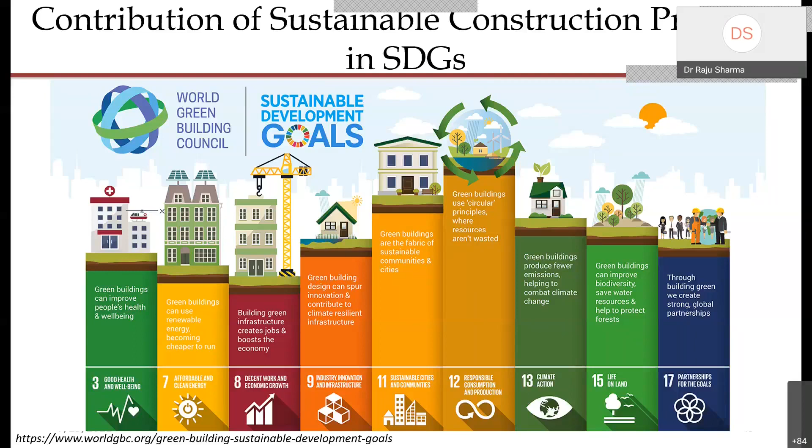Here they made a statement recently. China gave a document saying that because presently they are using fossil fuels for their production and working, it is very difficult for them to suddenly change their entire running infrastructure from fossil fuels to renewable energy completely. Presently they occupy 23% of global energy demand, and that is based on fossil fuels. They say it is very difficult for them to suddenly reduce these things.

So up to 2035, we may utilize 23, 24% or 21, 22% of the global energy demand. But after 2035, we will almost replace our entire existing culture of working on fossil fuel with renewable energy based systems, and from 2035 to 2050 we will get zero carbon emission from the country.

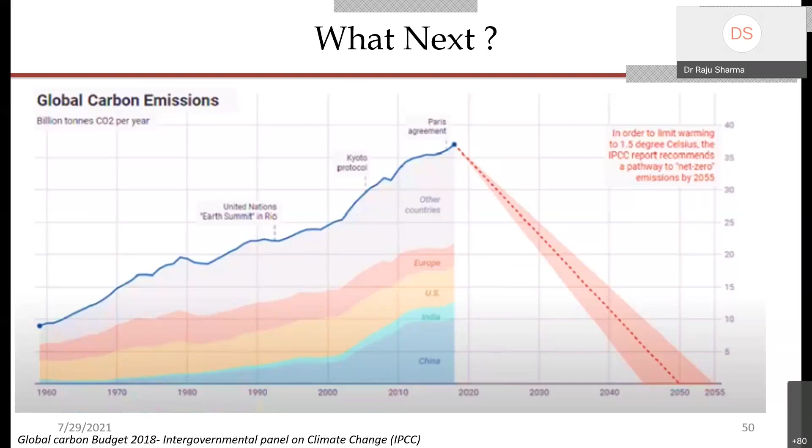And you know that presently India also has some codes on which they are measuring new buildings as a base to make green building ratings. So that work is also going on in that area. Many experts are there - maybe you have heard from some speaker who gave a talk earlier on this topic, on how to measure the green rating of the building. So this is the overview, a holistic approach of what we are doing and where we have to reach. These are the references, and thank you.